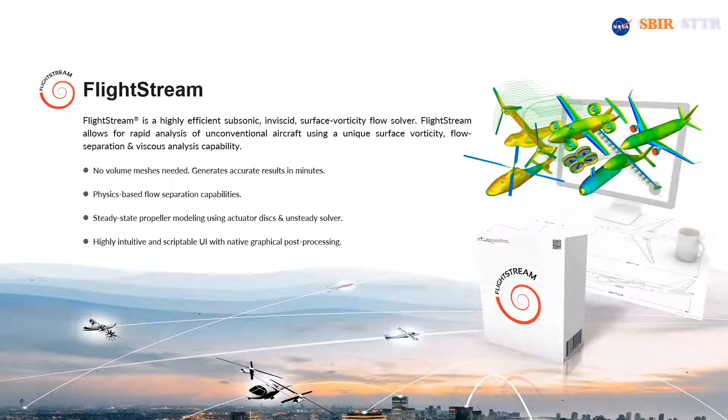Moving on to our involvement with VSP: in 2014 we went to the VSP workshop in San Luis Obispo and introduced FlightStream to this community with some VSP models. Ever since then, and continuing to today, we use VSP pretty heavily as one of our mechanisms for getting geometry into FlightStream. For this project we used VSP pretty heavily, and Amon's going to show you some very interesting stuff we were able to do with the VSP models.

There are several different ways you can get VSP geometries into FlightStream. VSP now offers CAD export, which we can exploit and have done quite a few examples with. But the thing we probably rely on most is CompGeom to do direct mesh creation or manipulation in VSP, and then export that to FlightStream. We now have some mechanisms to do control surface deflection—still refining and improving that capability, but it's a really nice way to get deflected surfaces into FlightStream. We're looking at more robust ways to connect VSP without having to go through the CAD functionality.

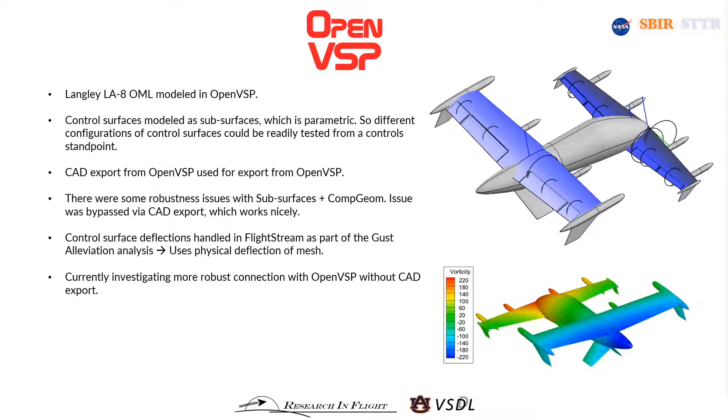We've done a lot of validation studies with FlightStream over the years, but for this STTR project, which has been UAM related, the LA8 configuration at Langley has been a very instrumental piece of our validation. Steve Guether at Langley has both run the wind tunnel test and done some validation work himself. We followed up with more validation work, and here you're seeing the wind tunnel results from the 12-foot tunnel at Langley compared with the FlightStream results.

You can see why you really need something more detailed than a vortex lattice code. We capture the complex geometric effects here on the aeroloads, and you can also notice that we capture the flow separation pretty well. So we're really quite pleased with these LA8 validation results.

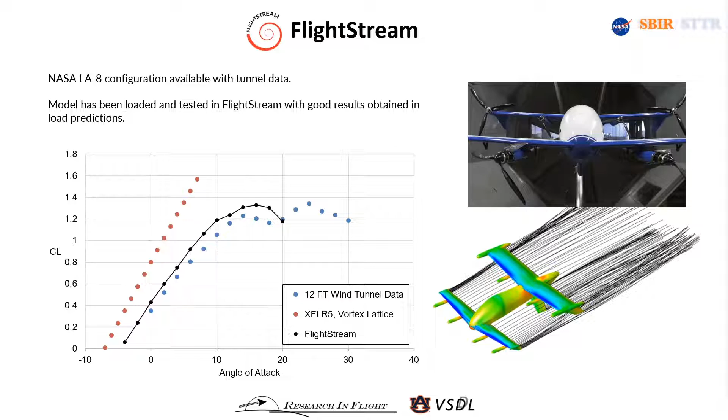This is just a little bit more to show some of our comparisons. We have a paper at SciTech next year to outline all this in much more detail, but here we're just looking at drag coefficient and moment coefficient. We've been quite pleased with the results on both.

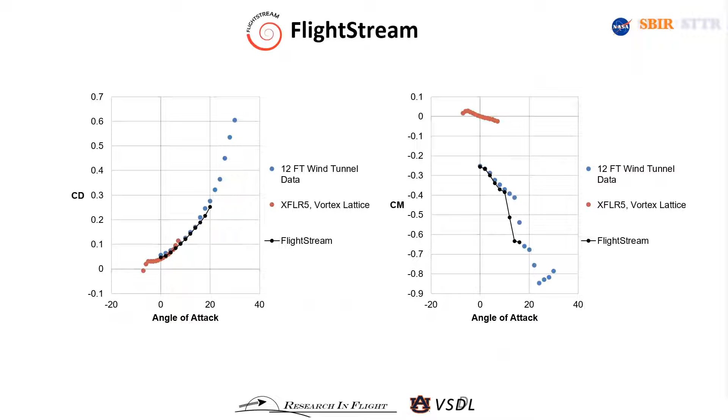So, a little summary of the FlightStream stuff: it's a vorticity-based solver developed by Research in Flight over a period of about 6 or 7 years to mature, and it's now matured into something we think is very capable. For this STTR project, we started developing additional capability using a tool called CLASP, Controls and Load Alleviation Simulation Platform. That's Amon's part of this project, and he's going to spend quite a bit of time describing that in just a few minutes.

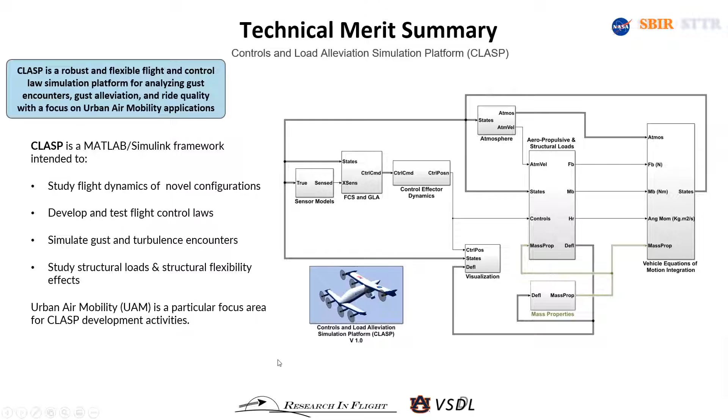Our focus thus far has been on hooking together this framework and getting it to a point where, even if the underlying analyses are somewhat simplified, we have a proof of concept of the integrated functionality. CLASP allows us to model sensors and flight control laws, as well as gust load alleviation algorithms and the dynamics of control effectors. For instance, a control surface is an example of a control effector. Propulsors for UAM type vehicles are also examples, and they all have their individual dynamics—they're not instantaneously acting, so we can model those within CLASP. We can visualize the flight of the aircraft through an interface with FlightGear Flight Simulator.

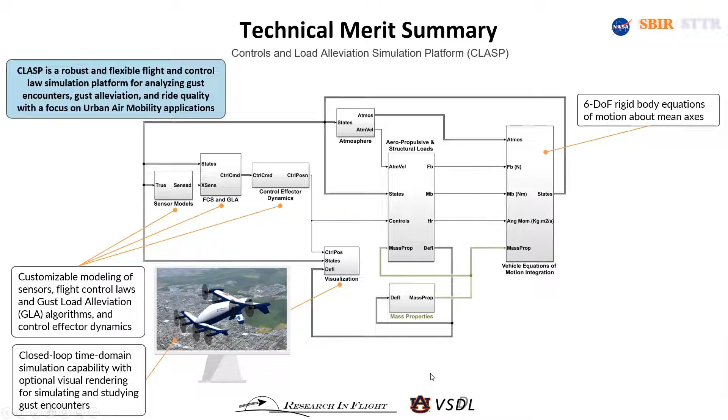We'll see some examples of that later on. We have the ability to do closed loop simulation, with the controllers active. We use rigid body equations of motion, 6DOF, about the mean axes, because that allows us to use modal approximation for the structural dynamics. At the core of this, we have the aeropropulsive characteristics of the aircraft, derived from FlightStream analyses, which then get incorporated within the CLASP framework, either as lookup tables, embedded analyses, or reduced order models of some sort.

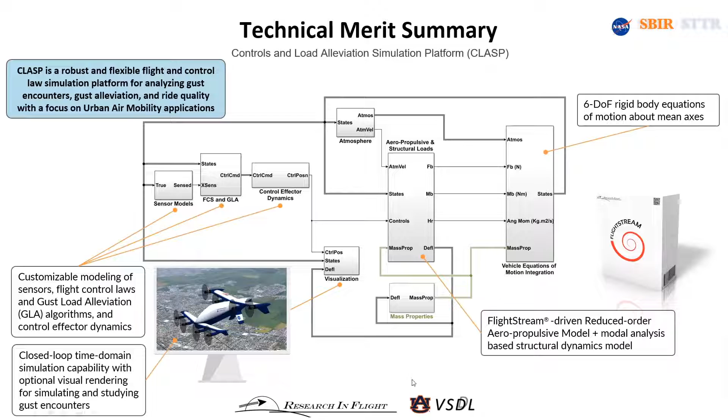Without getting into too much detail, I'll make a few comments about this gust modeling capability. We have a complex looking diagram here, but the part about FlightStream is shown in the orange boxes—this is where we interact with the CLASP functionality. Basically with FlightStream, we have the geometry coming in with control effectors and propulsors.

We put in whatever position and orientation is required, then run through an unsteady solver and look at the evolved loads, and output the loads to the 6DOF. We close the loop by going back through the time-dependent boundary and time-dependent wake evolution, reposition the geometry, and do the unsteady solver again. The output then interacts with Amon's CLASP tool. So we'll go to the next slide.

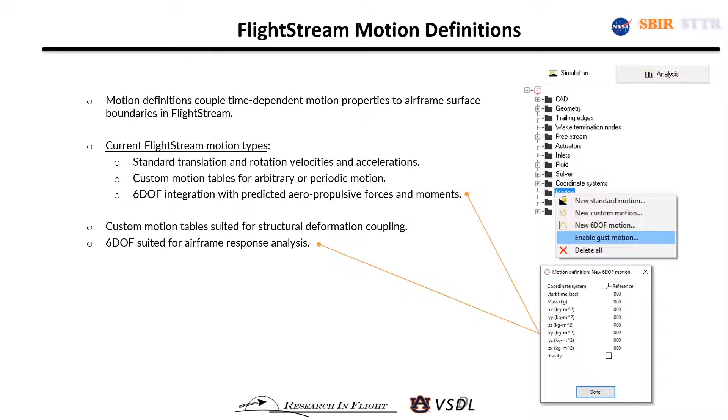In order to do this problem, we had to put in motion definition. This slide describes the motion definition capabilities we've added to FlightStream. We've got standard translation and rotation velocities, but also custom motion tables, and 6-DOF integration with some additional motion capability there. We can talk a lot more about that offline, but we do have an unsteady solver—unsteady at the surface—and unsteady loads we're able to generate with rotating propellers. This forms the foundation of what we're doing with this gust modeling.

I won't get into too much detail with exactly all the details of the unsteady solver, but this is just illustrating our capability to do both 6-DOF type motion and propeller blade rotation with the effects on the wings there.

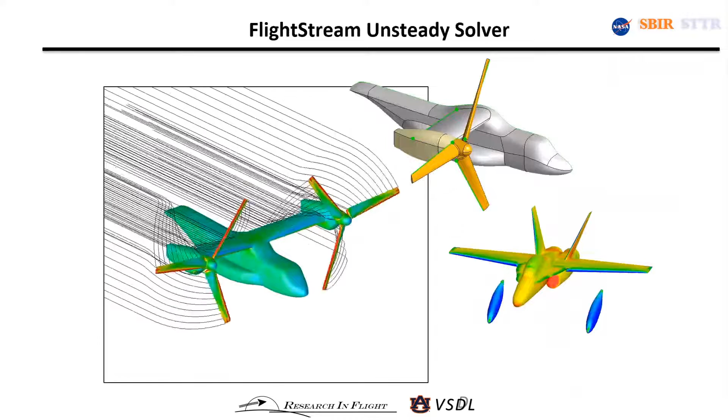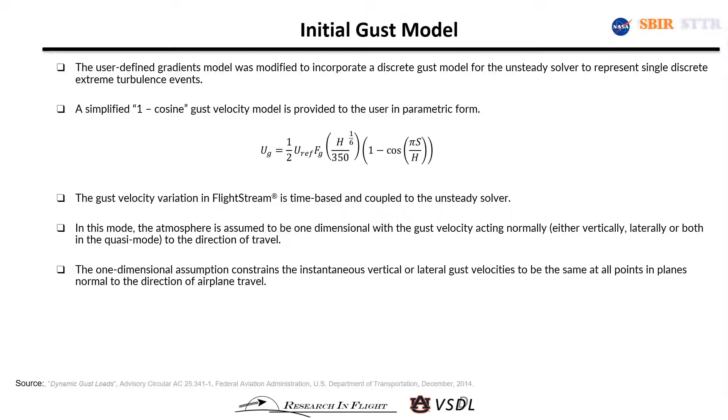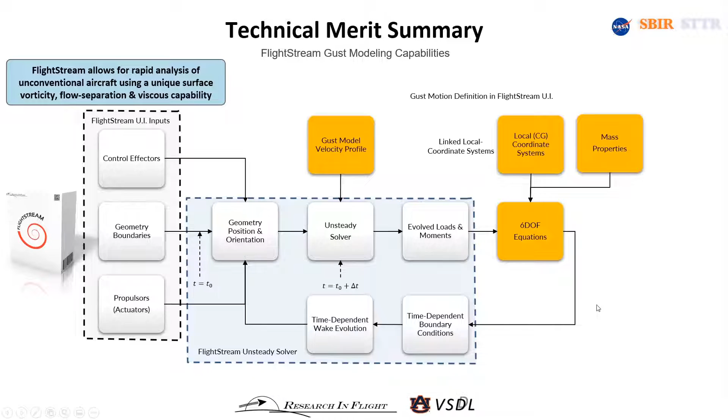In our STTR reporting, we have to talk about the technical merit, and FlightStream basically allows for the rapid analysis of unconventional aircraft using this unique capability for surface vorticity solving and flow separation with some viscous effects added. So it's kind of a middle of the road in terms of fidelity, but it offers the speed required to actually approach this gust modeling problem.

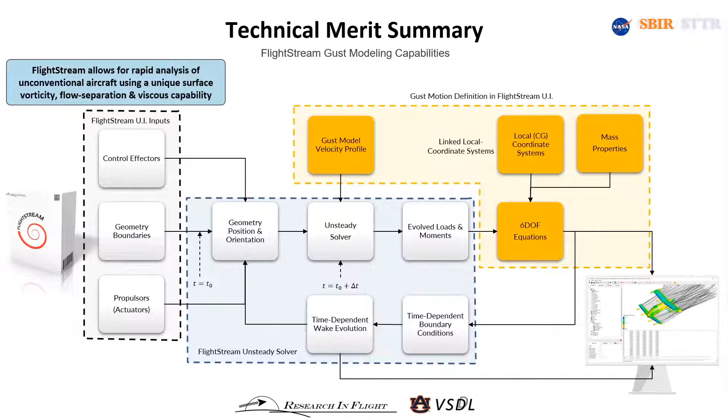I'm going to give Aman a chance to talk a little bit more about the gust definition when he gets to his slide.

So the gust encounter problem is just illustrated here in this little video. You can see what happens to the load as the gust goes over the airplane. This is basically just a time-dependent evolution of the gust passing over an airplane in forward flight.

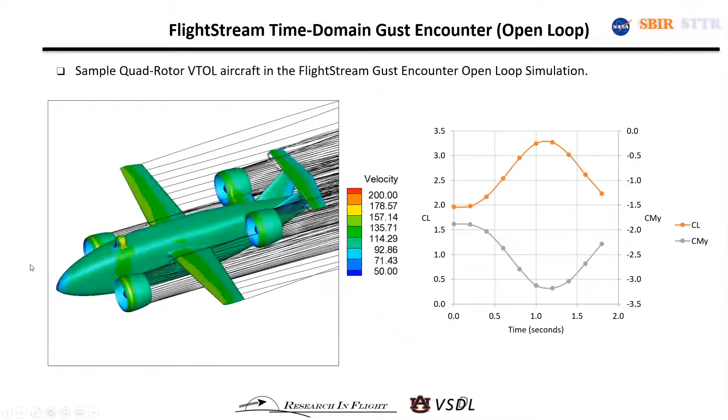So this reduced order model essentially reduces the aero, in order for us to interact with Aman's CLASP tool, to a quarter chord imposition of loads along the wing. This allows us to go to a strip model and interact with the flight dynamics software and simplified models. This is a novel approach we've decided to take with this particular project, because the whole idea is it allows us to get better fidelity loads than you could get with vortex lattice, but still apply the loads in the same way as if they had come from a vortex lattice tool.

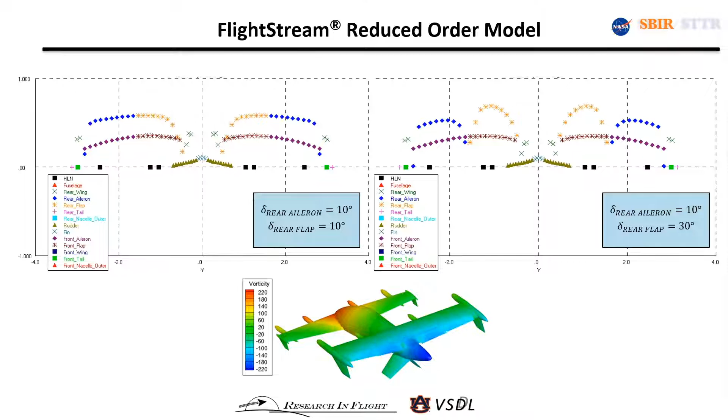So this is just some examples of some reduced order model loads that we've gotten from the LA-8.

So to do the aero analysis and FlightGear, basically we were able to generate an OpenVSP model and put it into FlightStream, get the loads, and then Aman was able to take CLASP and interact with FlightGear.

The other track, mostly for the flight simulation and visualization track, has the same OpenVSP model exported into AC3D, which is a geometry rendering tool, and we create a flight gear aircraft model for the flight gear flight simulator. When the CLASP Simulink model operates, it actually pushes data and interfaces with the flight gear flight simulator, and that provides us a visual rendering of the flight and trajectory of the aircraft.

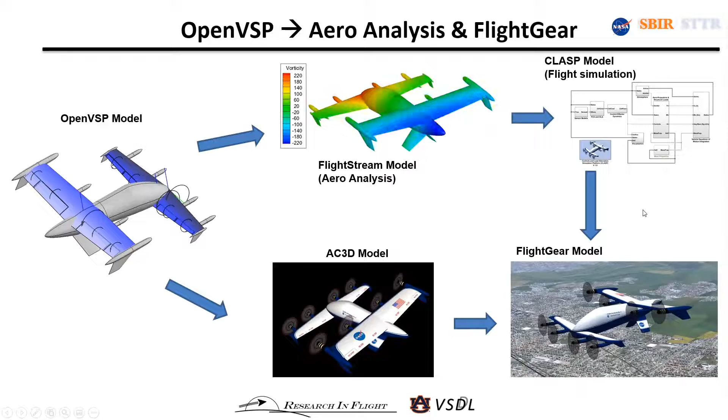Now let's talk about how we've modeled the flight dynamics and the structural dynamics of the aircraft within CLASP. As Roy alluded to previously, we use a strip theory-based aerodynamics model, an aero propulsive model.

The idea is that the lifting surfaces on the aircraft—for phase one we've just concentrated this to the fore and aft wings—we look at the aerodynamic loads as a buildup of loads over a large number of span-wise strips on these wings. At each of these strips, we can compute the local incidence angle seen by that strip by looking at the gross motion of the airplane, its attitude relative to the oncoming free stream, any angular rates like roll, pitch, yaw rates it has, the geometric location of where those strips are, as well as the effects of downwash, and also if there's any structural deformation going on, that creates a normal component of velocity seen by the strip as well.

Also, as Roy alluded to, using the strip theory-based model, sectional loads basically originate at the quarter chord point of these strip airfoils.

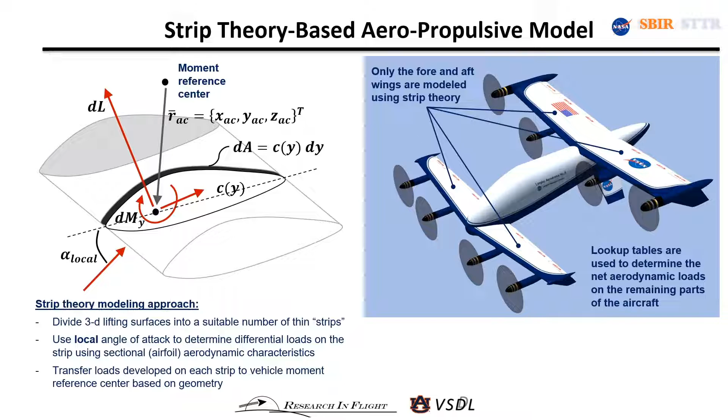And depending on where that quarter chord point is, we then sum up the loads and moments relative to the aircraft's moment reference center. So that, in a nutshell, is how the strip theory-based model works.

In phase one of this effort, we've focused on forward flight conditions, and we haven't looked in great detail at the effect of prop wash going over the wing. So those are all activities we've got lined up if we have a phase two funded.

We also want to have a tighter integration between the reduced order model that Roy mentioned that would come out of FlightStream, and then directly integrate it into CLASP.

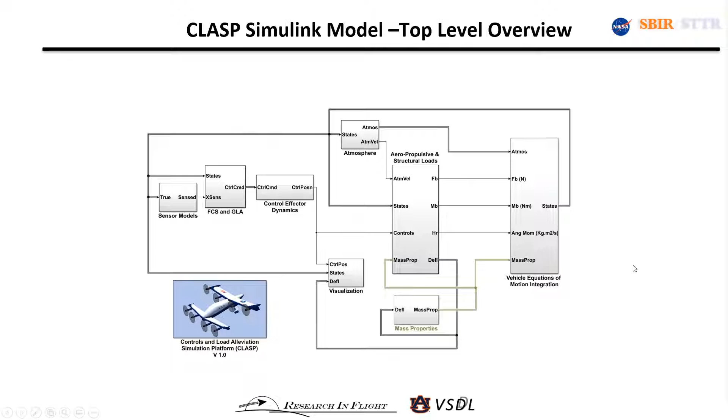Here's a top-level overview of the CLASP framework, the Controls and Load Alleviation Simulation Platform. This is a Simulink model, and this is the top level of that model. We have, in this sensor models block, models for the dynamics of sensors.

So the difference between a true state and a sensed state as sensed by the sensor. Obviously, these sensors have their own dynamics, probably bias or noise. So those things we can model within this block.

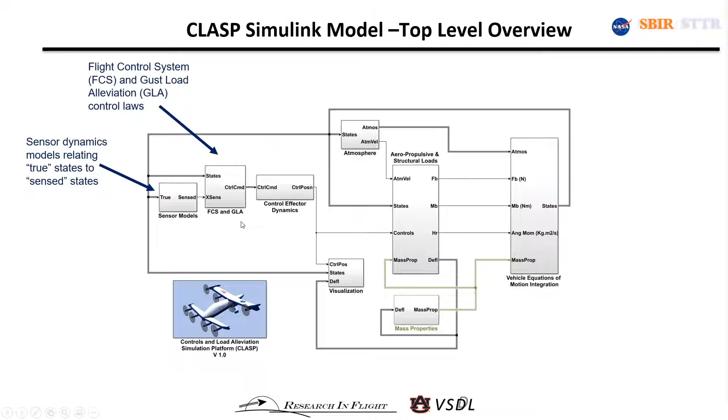So flight control system, FCS, and gust load alleviation, GLA. The control laws for closed loop control of the vehicle are all modeled within here, and there's great flexibility as to the type of controllers that are modeled. We'll see some examples of what we've incorporated for our phase one.

Between a control command being generated and a control effector assuming a particular state, there's of course the dynamics of the control effectors, which we can also model by anything starting from a first-order dynamic to a second-order dynamic, or anything even more customized. So these are all possible within the control effector dynamics block.

We have a fairly robust way of defining how the atmosphere itself is moving, so the ability to program in winds and gusts and turbulence. This is something we have in this atmosphere block.

The main block, basically the heart of the CLASP framework, is of course where the aero-propulsive loads and structural deformations are summed up. And once we have the gross loads over the entire body, we integrate the equations of motion to compute the time history of the trajectory of the body.

And because we use the mean axes as the vehicle deforms, the center of gravity of the vehicle will also move. Imagine the wings bending - that's going to result in a movement of the center of gravity. And the mean axis approach requires that the position of the center of gravity is tracked for the rigid body equations of motion.

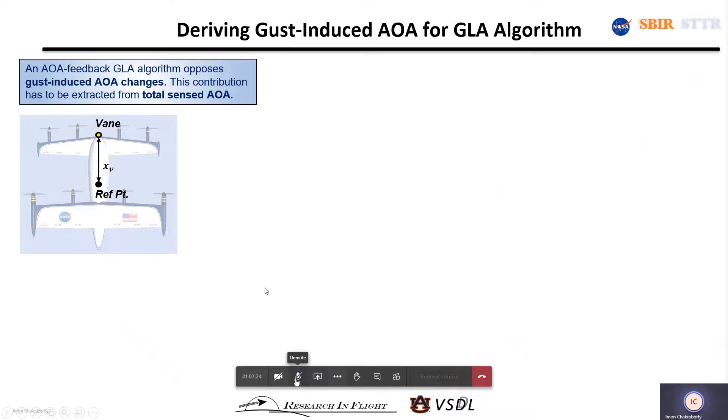So now I'll talk a little bit about the gust alleviation algorithm we've got implemented right now.

Hey, Imon, if I could pause you for just a moment - we have several questions here in the Q&A. Before we continue on, regarding the Simulink control system model, is that open source, or is that all controlled and owned by Research in Flight?

Well, it's very much in the development stages right now, the CLASP framework. It is something that we ultimately plan on commercializing, so the end goal is it would be available as a commercial tool, just like FlightStream is.

All right, understood. Could you elaborate on the type of controller that was implemented within this algorithm? Absolutely - actually, I was going to walk through that in the following slides.

Wonderful, wonderful. Another couple questions, just very briefly. Can the derivatives and the lookup tables mentioned in the MATLAB 6DOF model be reliably extracted from OpenVSP, or do you rely on FlightStream for that? We rely on FlightStream for the aerodynamic analyses that generate the lookup tables.

Wonderful. And now we've got a question here that says, it looks like FlightStream assumes a rigid structure. Can it also work with a flexible structure, or is it all rigid body?

Yeah, no, I can answer that. Of course, the steady solver assumes a rigid body, but we do have an unsteady solver that is able to do the non-rigid structure problem.

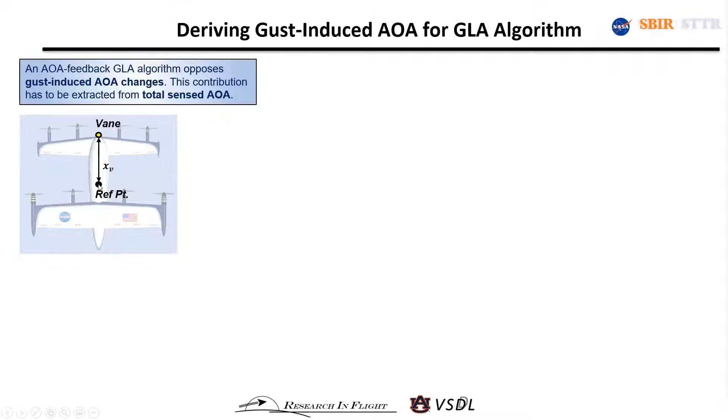The thing to note is that because there's an offset between the airplane reference point, you can think of it as a CG, and the vane, the angle of attack picked up by the vane is also affected by any angular motions of the aircraft. So we're able to model within CLASP what the angle of attack sensed by the vane is as a function of where the vane is located and the motion of the aircraft.

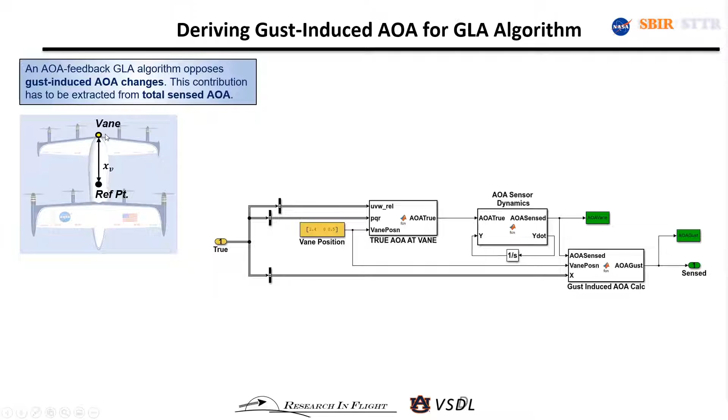And since this angle of attack vane is bound to have dynamics of its own, we can represent the dynamics of that sensor in as simplified or as complicated a manner as we want, so there can be n number of sensor states. And the gust alleviation algorithm, of course, we don't want it to respond to the total sensed alpha. We want it to respond only to the gust-induced angle of attack.

So there is a way to extract the gust-induced angle of attack from the total angle of attack seen by the vane. Now there are two ways of looking at this, and that depends on whether we assume there's a change in the gust field velocity over the dimension of the vehicle. So imagine, is the velocity of the gust changing over this length of the vehicle?

If the answer is no, then we can just calculate the angle of attack at the vane based on the relative location of the vane to the reference point where the aircraft motion states are calculated. On the other hand, if you have a velocity field where there's appreciable variation of velocity between any two points on the vehicle at the same time, then what we can do is add the position of this angle of attack sensor to a list of query points used to query the state of the atmosphere, so we can get the velocities directly.

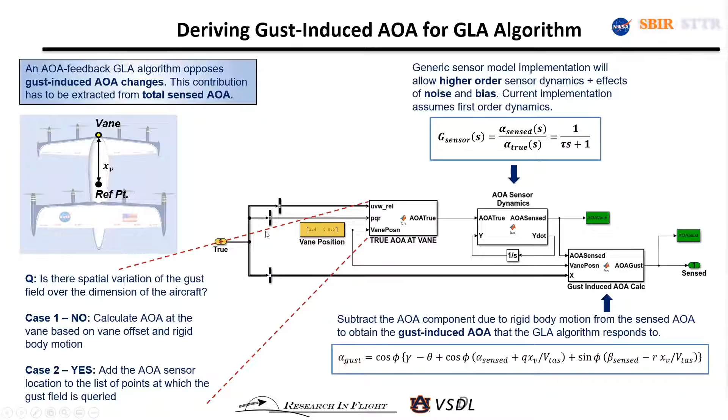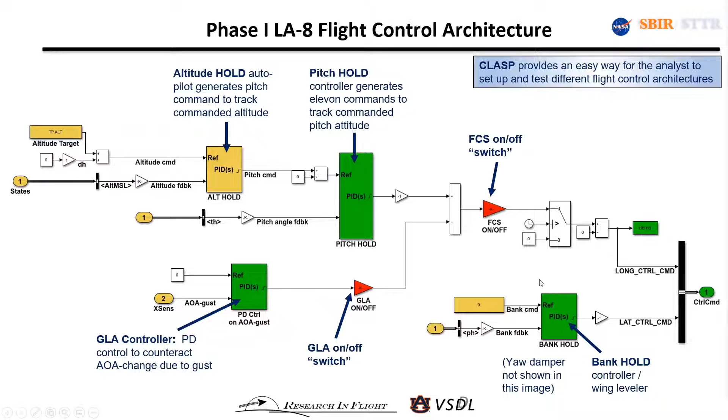But we anticipate that for our specific problem, we're going to have plenty of cases where the wind velocity changes over the span of the body. So we have this user-defined velocity field as well.

So query points in our case would be all the aerodynamic centers of all the strips on the vehicle, as well as the locations of any air data probes on the vehicle. So we would want to query the velocities seen by each of these points because they factor into various calculations downstream.

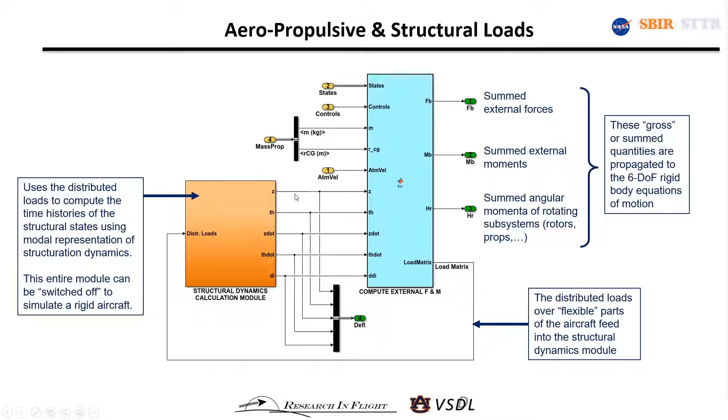The same loads in a distributed manner get put into a load matrix, which has basically the distribution of bending and torsion loads over all the flexible structures, and that goes right back into the structural dynamics block to compute the new deformed state. So this is happening at every time step of the simulation.

The structural dynamics modeling that we've got so far for phase one assumes that the only flexible components on the aircraft are the four wings, and they're modeled as cantilever box beams. So they're rigidly fixed at one end, and they're cantilever free at the other end.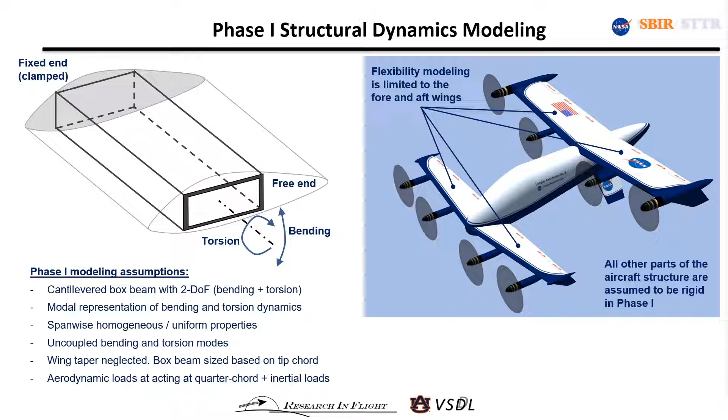And they have degrees of freedom in bending in the lift direction, if you will, and also torsion in the twist direction. And for phase one, we've assumed that the bending and torsion modes are uncoupled, and it's just a simplification made to do an initial implementation.

We've sized the box beam based on a small optimization problem. So it's basically, if you assume that the leading and trailing edges are at fixed locations, how thick do you need to make the box beam in order to satisfy a tip deflection and a tip twist constraint, as well as lower bounds on first bending and first torsion frequencies, subject to a certain n-g load condition.

So that's solved as a small pre-processing optimization problem. And once that problem is solved, we get the bending and torsion mode frequencies as well as mode shapes. So you see the bottom right, the first three mode shapes for bending and torsion, as well as the frequencies for bending and torsion modes.

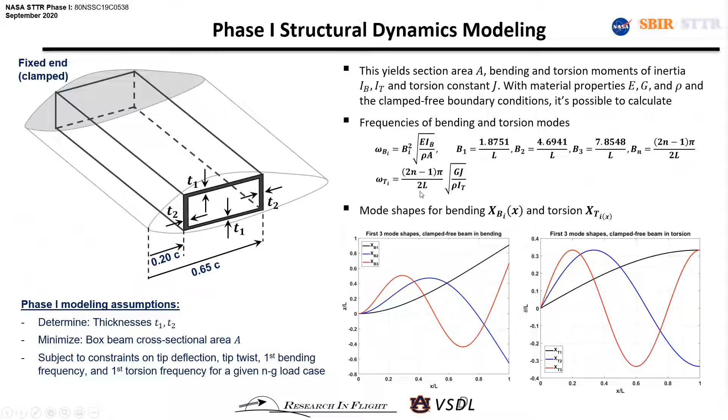These all get embedded into our structural dynamics model. And the way we calculate the deformed shape of the wings as a function of time is by a modal approximation method. So what that does is it evaluates the physical deflected state as a truncated summation of those mode shapes that you saw, along with generalized coordinates representing bending and torsion. And the user has freedom over how many modes of that infinite summation the user wants to keep before chopping off the sum and truncating it.

So within the structural dynamics module, we have these distributed loads that come in. And if you have structural modes in bending and torsion whose frequencies are close enough to the rigid body frequencies that you want to integrate them together with the rigid body motion, then that can be done. So here you have actual time integration of bending and torsion modes whose frequencies are relatively low.

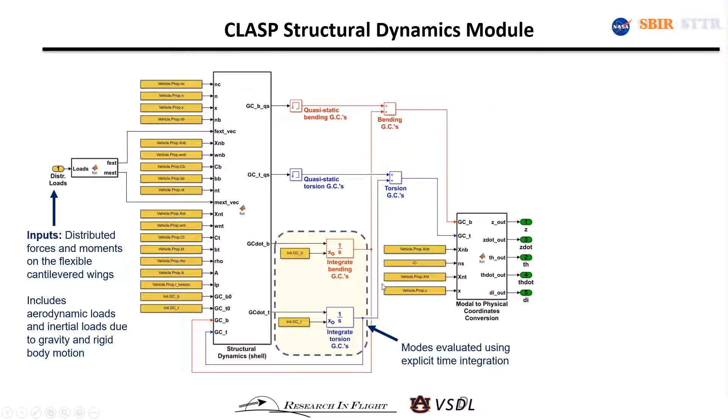If, on the other hand, you have bending and torsion modes whose frequencies are high, then what that basically means is that as far as the rigid body motion of the aircraft is concerned, those particular modes are always in quasi-static equilibrium. So then we don't bother with time domain integration, and we just propagate the quasi-static deflections directly.

So in a typical problem, the lower few modes will be time integrated, and higher frequency modes will just have the quasi-static contributions. And finally, the modal coordinates are abstract coordinates. They have to be converted back into physical coordinates, so things we can visualize, like a bending deflection or a torsional twist, and the rates at which these deflections are happening. And these will then get output to aero-propulsive and mass properties modules.

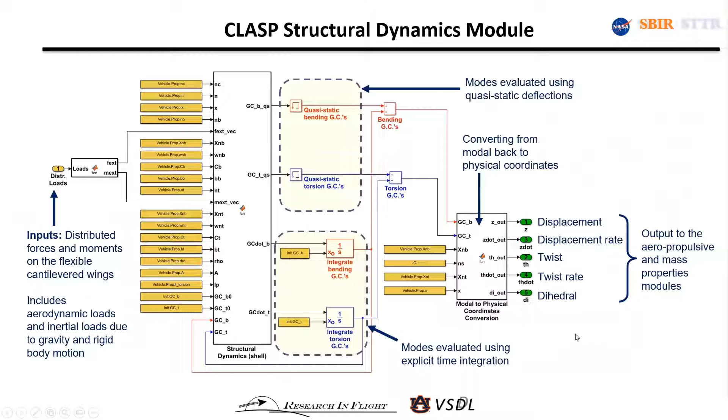One interesting thing we had to figure out was, how do we trim this flexible airplane? And not only how do we trim it, but how do we do it without having to change the setup of the trim problem if we decide to switch the structural dynamic stuff off and do a rigid body simulation. So the flowchart on the right shows what we ultimately came up with.

So you have the trim algorithm, which is actually an optimizer. The reason we've set it up as an optimizer and not a root solver is because we totally foresee trim for these UAM type vehicles as being... I mean, these are all over-actuated systems. So there are far greater number of control knobs than the degrees of motion freedom of the body.

So in the general case, there will be more than one unique trim solution. So to choose among them, we have to minimize some kind of an objective function. That's why trim is set up as an optimization problem. The optimizer is basically passing down trial solutions of control and state variables. Control variables would be control deflections or propulsor RPMs or blade pitch, and state variables would be angles of attack, angle of sideslip, and so on.

And for each such trial solution, we first iterate the aerodynamics and the structural dynamics to an internal convergence. So think of it as exposing the aircraft to the airstream and letting the flexible structure blow itself into an equilibrated state. And then once that internal convergence has happened, we then go and check whether the 6 degree of freedom equations of motion are satisfied. So is there dynamic equilibrium there?

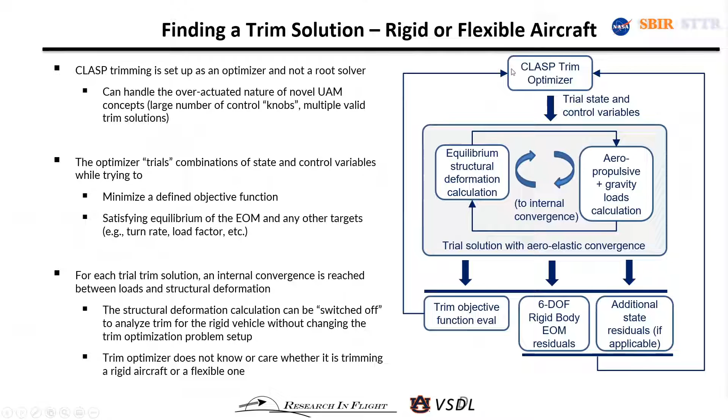Okay, so now we just look at a couple of quick results. We've simulated a symmetric gust encounter, so longitudinal motion only. We've simulated an asymmetric gust encounter, which is basically just one half of the airplane, so just imagine the right wing encountering a gust and nothing happening to the left wing. And then turbulence. Okay, so here's a symmetric gust encounter simulated by CLASP.

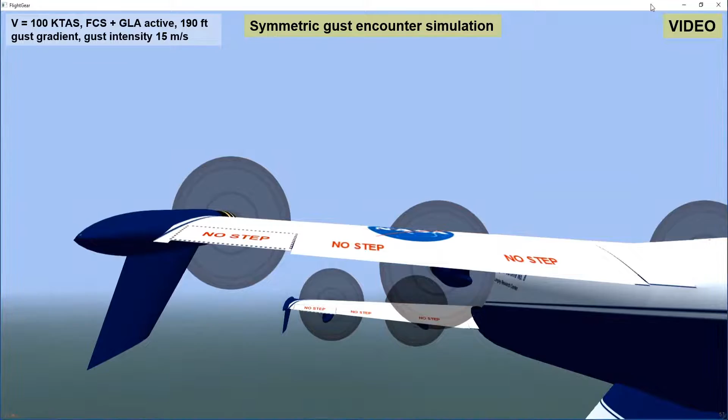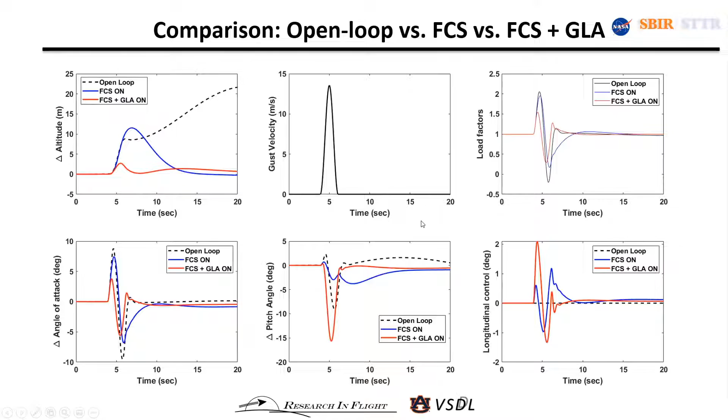Angle of attack is directly related to the amount of excess lift, which is directly related to the load factor. As a result, the peak load factor is lower, but at the same time the control action taken is a lot more aggressive. If you look at the red control input for the elevons versus the blue control input, that's a lot more aggressive. So this is just a proof of concept—can we see the difference between these three different simulations?

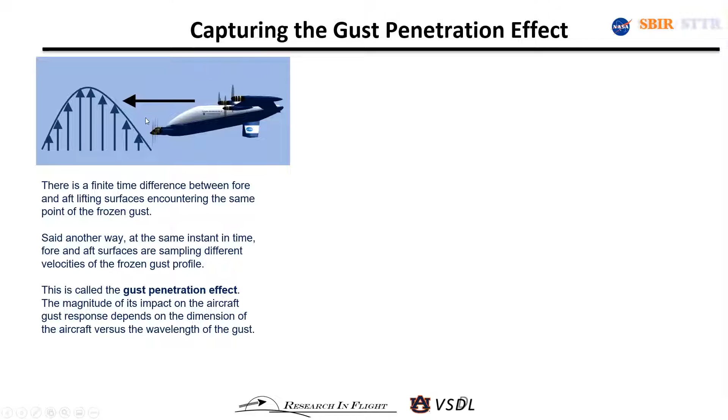Another interesting thing is that once this vehicle flies into the gust, there's a finite length of the vehicle and a shape of the gust. The front and aft lifting surfaces sample different velocities at the same instant in time, and this is called the gust penetration effect. In the earlier part of our work, when we just used static lookup tables, we were just querying one single alpha for the whole vehicle.

So we couldn't really capture this gust penetration effect. When we did that same gust encounter back then, the moment the vehicle encounters the gust it pitches down. Intuitively you'd think as this wing enters the gust, the vehicle will pitch up first, and then as both wings enter the gust, static stability will take over and the vehicle will pitch down. But if you don't take into account the gust penetration effect, you can't capture that pitch up. With our strip theory-based model now, there's the pitch up—this is when the front wing has entered the gust but the back wing has not, so the vehicle pitches up, and then the pitch down happens as both wings get into the gust field and static pitch stability begins to show its effect.

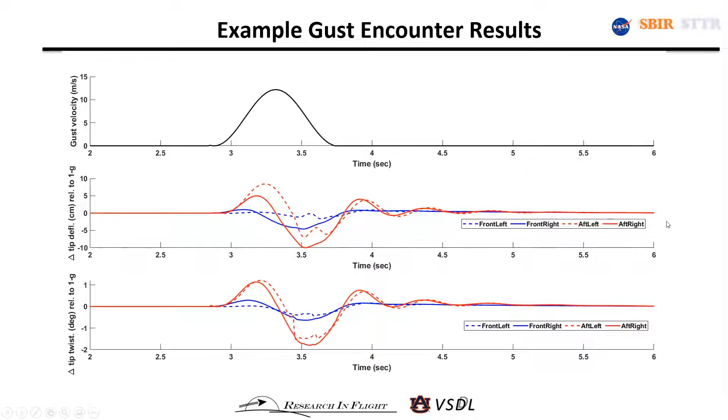Here's an example of an asymmetric gust—only the right wing gets hit, so the lateral controllers come into play trying to stabilize the bank angle of the aircraft. This is just an expanded view of the deflection and twist of the tips of all four wings when it encounters the gust. So it sets up a structural dynamic, and then that dies down after some time.

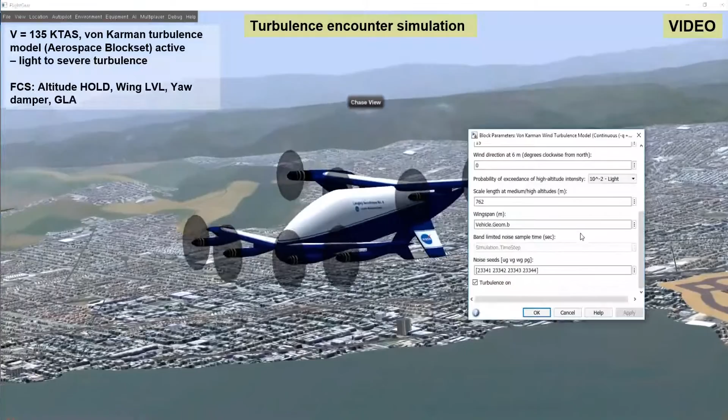The final thing is a turbulence simulation. This is just using the von Karman turbulence model that's part of Simulink, so basically you turn on the turbulence and turn off the turbulence as you please, and then you can see how the vehicle responds to that turbulence field. The control action is a little bit difficult to see because they're small, but the elevons are being deflected by the control system to try to counteract the turbulence, and the severity of turbulence, of course, can be varied as well.

So to summarize, we believe we've got a reasonably good proof of concept setup of the CLASP environment and getting information from FlightStream. If we get funding for phase 2 of our work, this is going to be our launching point, and we're going to add capabilities, most importantly for vertical flight mode. All our work has been forward flight in this phase, so our top priority for funded phase 2, if it's funded, is vertical flight mode for UAM type vehicles.

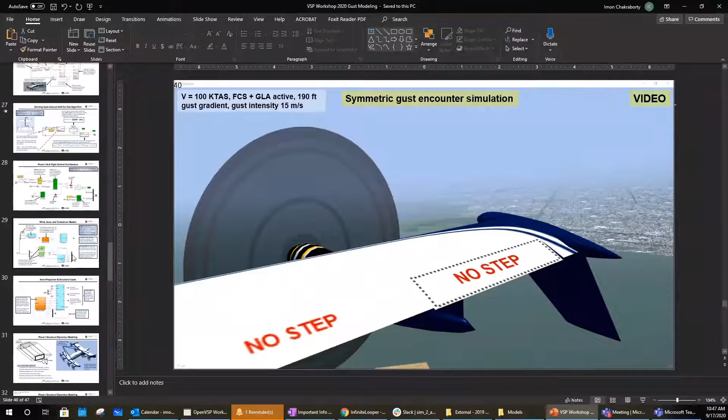In our strip theory based model, only the lifting surfaces are analyzed using strip theory. For the rest of the airplane, the fuselage and the vertical fins, which are considered rigid, we've run FlightStream on the whole geometry and created static lookup tables for the assumed rigid part of the geometry. So the fuselage and the effects of the fins are lookup tables for the 3 force components and 3 moment components as a function of alpha, beta, and rates.

The strip theory model is for the flexible part of the vehicle, so the 4 wings are strip theory. The implementation is general to the point where, provided the lookup tables are in a particular format—like Z as a function of XY—it's insensitive to whether that comes out of FlightStream or out of any other aerodynamic analysis tool.

This was actually one of the starting goals of the CLASP environment: it should not be married to any one source of aerodynamic data. So yes, if there's analysis coming out of VSP Aero—I think that was the question—then we just have to get the lookup table into the agreeable format, and we would be able to do the simulation. We don't have a demo of that at the moment, but this is something we could definitely pursue in the future.

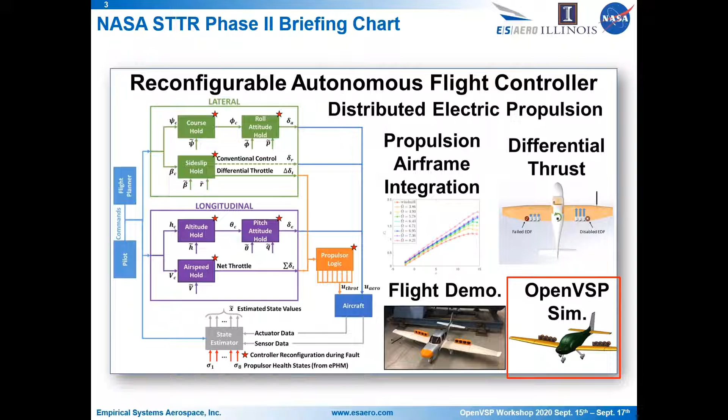What we'll be focusing on today is the comparison of our estimation of flight dynamics with OpenVSP and the system identified flight dynamics from our flight testing campaign of the subscale vehicle.

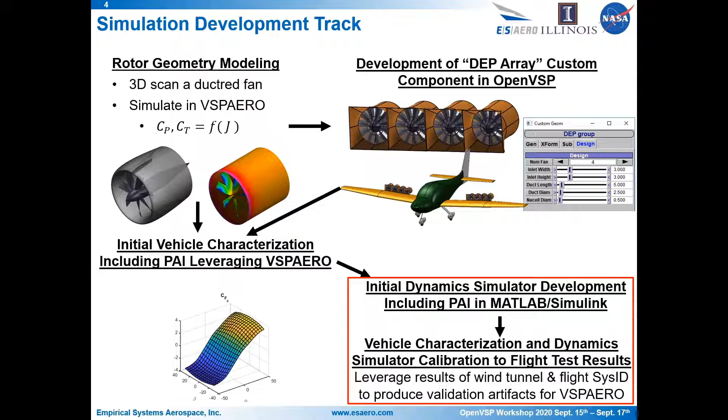On the VSP Aero side of things, last year one of our engineers, Nick Brake, presented a status update on this program, detailing how we modeled our ducted propulsors in VSP, our development of a DEP array custom component to ease the modeling process of those propulsors geometrically, and our initial vehicle characterization, including propulsion airframe interactions using VSP Aero. What we'll be talking primarily about today is our initial comparisons of those dynamics estimated in VSP Aero to flight test data and system identified flight dynamics.

With that, I will dive right into how we're modeling our aircraft dynamically and our comparison between VSP Aero and flight test.

To begin, we start off with standard textbook longitudinal and lateral directional aircraft dynamics systems of equations in 6 degrees of freedom motion, presented here in state space form. We have a handful of stability and control derivatives for the baseline aircraft with control surfaces that can be estimated by use of VSP Aero and the automatic stability calculation subroutine within it. For reference, I also provide our axis system, which will be relevant to keep in mind later for positive forces, moments, and control surface deflections.

From that baseline 6-DOF modeling, we also wanted to capture the influence of propulsors on the aircraft dynamics as well as control. So in order to do this, we characterized the propulsor used on the subscale flight test vehicle using XROTOR to build an aero performance map.

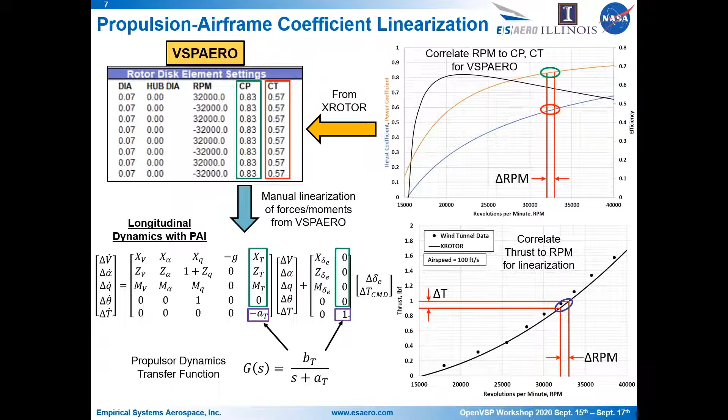From here, I want to take a look at how we're using VSP Aero for this. We started off by using the simplest solver, the vortex lattice method steady solver, with the geometry observed above. It was a really fast and computationally efficient method for generating aero forces and moments, generally effective for very simple planform geometries like our conventional Cirrus SR22 model. It also had the benefit of being able to use that subroutine for calculating stability and control coefficients for estimating derivatives.

But while we were working on that, the unsteady solver came out, and we decided we also wanted to explore that for producing similar data sets, primarily because we were interested in what might have been a more representative propulsor behavior rather than the rotor disks used in the steady solver. However, we quickly found out, due to the very high RPM of the propulsors compared against the very low velocity of the aircraft, it became a very slow and computationally heavy process.

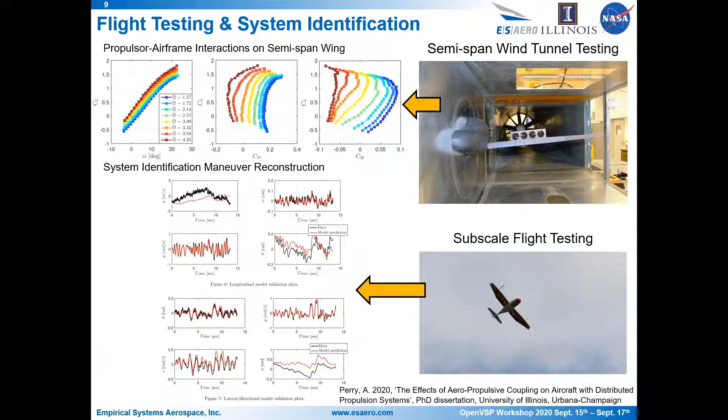With that, I'd like to dive into the beginning of our comparisons of these models. So the first step in comparing the models is the model architecture itself. The system of equations that underpin the estimation methods between VSP Aero and system identification are largely similar but differ in important ways. The primary way in which they differ is the definition of propulsor contributions to the flight dynamics.

As I mentioned before, with our VSP Aero approach, we are looking at differences in thrust input with a propulsor dynamics model included for an actuated response in the aircraft dynamics.

But in the system identification model, the flight test data extracted from the flight test campaign really can only trace throttle input. It's very difficult to get beyond throttle and connect the dots between throttle and thrust. So in addition to that, there are no propulsor dynamics included. There's an assumption that they may not be significant enough to warrant inclusion in the dynamics here. So those differences are hard to bridge across the gap.

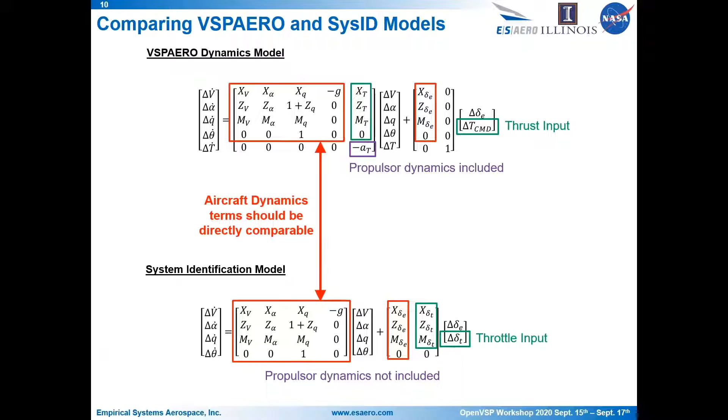In addition to looking at the models themselves, we have to reconcile what is actually happening when we linearize forces and moments between the two approaches. This is probably the largest takeaway from our work thus far: in VSP Aero, you can set the vehicle to a specific trim flight condition and run analysis on that.

If you want to look at how forces and moments change with a deflection of the elevator, you can do so while keeping the vehicle parametrically locked, holding all other parameters constant—same airspeed, same angle of attack, etc. This allows for a more decoupled analysis of each state and control parameter to narrow in on their specific contributions to dynamics. This is most similar, in the physical testing environment, to a wind tunnel test on a fixed sting, where you can hold the vehicle in a flight condition and perform these tests.

On the system identification side of things, even though the equations of motion which underpin the analysis are very similar, the vehicle is flying and therefore is able to react to perturbations of control vectors. So with our example, if you're at a trim flight condition and you deflect the elevator, you will have a very quick response which changes other state parameters such as airspeed, angle of attack, nose down pitch rate, and attitude, which will continue to change throughout time very quickly, and you find yourself in a different dynamic state than you were before.

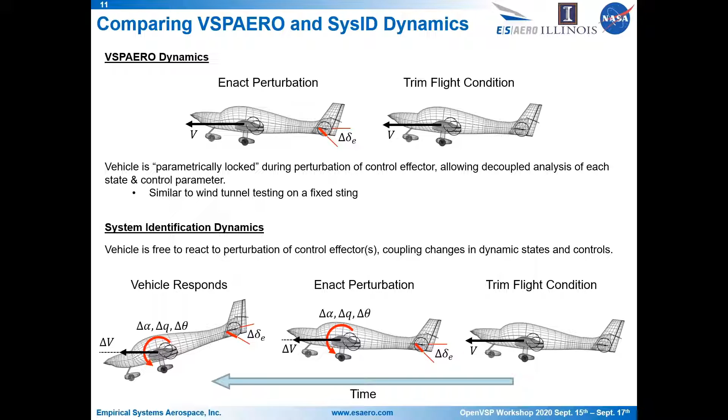The challenge that introduces is when you have very similar terms building out the equations of motion in state space form with different stability derivatives, it becomes difficult to determine whether the change in forces and moments should be attributed to the control deflection which you enacted, or the immediate changes to the other states which followed from that. So this muddies the water from an apples-to-apples comparison to something different.

The first being force in X due to changes in airspeed—that's largely a drag estimate, and it is known in the VSP community that the vortex lattice method has within itself a very rudimentary estimate for parasite drag. There are better ways to estimate that, even within OpenVSP, using the parasite drag tool to get a better idea of that characteristic. So that might help explain some of the differences there.

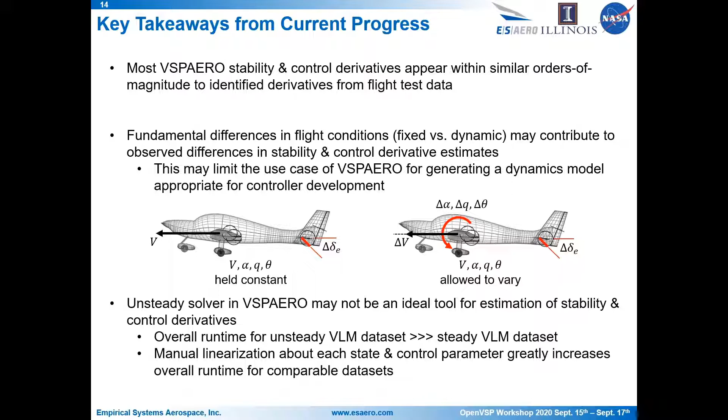From that, we have some next steps that we really need to address for our work. The first of which being to reintroduce the fuselage back into the analysis, maybe with a simpler geometry that represents the general shape of the fuselage, to see if we can correct some of those derivatives that are known to have notable effects from the fuselage itself.

And then, while we say that the unsteady solver might not be ideal for a full stability and controls analysis, we can still look at point cases by running a fully developed unsteady case at the baseline trim condition to compare results from steady and unsteady, and what that might tell us for our accuracy there, providing a more complete comparison of relative performance versus resource cost.

We also want to take a look at the VSP Aero and system identification estimates for propulsion airframe interactions and their effects. This may require converging the underlying dynamics models between the two approaches around propulsor parameters that can be tracked between both methods. The challenge being how we connect installed thrust on the flight vehicle to throttle, which is something that we can directly measure, and how we navigate that gap.

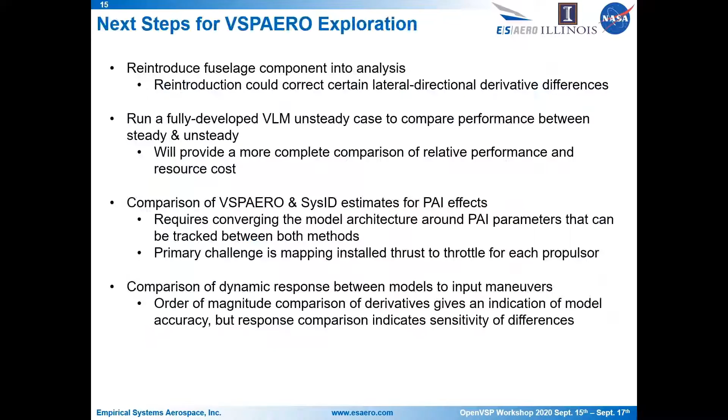Certainly, thanks Garrett for the talk. I think you make a really good observation about the discrepancy in timescales between what it takes to resolve an actual rotating propeller versus the dynamics of an airplane, just talking in terms of computational cost. I've also seen this when people think they're going to model a tiltwing through transition from start to end, but then resolve time-accurate rotating blades the entire time. A transition from beginning to end of a VTOL vehicle may take a minute, and if your props are at several hundred RPM, you'll need to model several hundred revolutions to capture that transition. Usually when someone runs a full CFD with a rotating rotor in time-accurate analysis, they consider it a big deal if they do 10 revolutions. So there is a fundamental difference in timescales you have to look at.

From the aircraft dynamics standpoint, the propellers really act as a time-averaged actuator disk when you're looking at modes like short period and phugoid. So you need tools that are mixed, and that's a question, clearly. The only other thing I'll add is that Dave Kinney is working on this. One of the things on his list, hopefully to do soon, is trying some even more simplified ways of modeling the rotating blades that would allow much faster modeling, closer to being appropriate for the aircraft dynamics timescale.

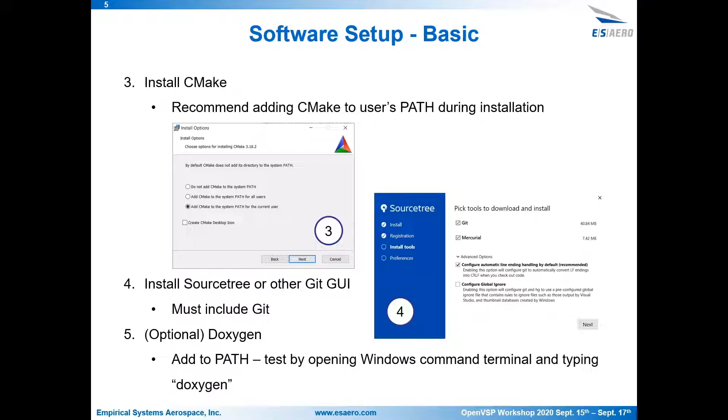When you download SWIG, if you're trying to build the Python API, you'll want to make sure you download the Windows version of SWIG—I think it's called SwigWin or something like that. I could go back and check the link if I included it. You'll extract the contents and place it in the directory if you like. If you're looking to build the MATLAB API, you'll need a different version of SWIG—you'll actually have to compile SWIG yourself. I'll be discussing that in the next presentation coming up.

So in terms of the MATLAB API, this presentation and the next one are very much linked together, because if you're building the MATLAB API, you also have to compile OpenVSP from source yourself as well.

When you're installing Anaconda, if you are using the Python API, I would highly recommend checking the box that adds Anaconda 3 to the system path variable during installation. It warns you against doing so, but I've never had an issue with it, and we've had users at ESAero compile with Anaconda using this installation method without any issue. Otherwise, you'll have to add Anaconda to your path manually, and I've had issues with that using the Python API. So this is just what I would suggest—adding it to your path during installation just makes everything a lot easier.

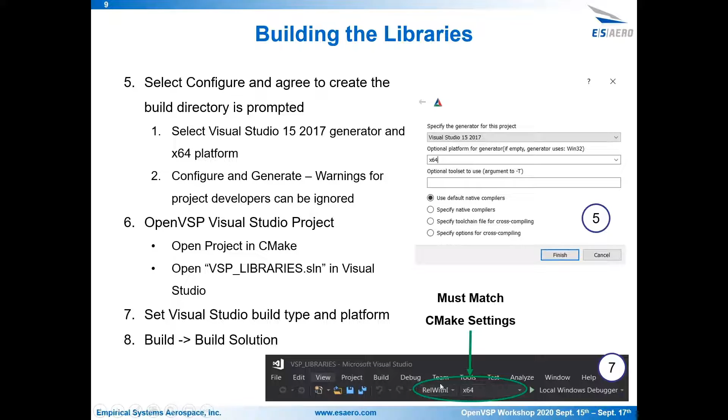Once you open Visual Studio, you'll have to make sure on the very top you match your build settings with what you selected for CMake. So what I had done was I added a CMake build type as Release with Debug Info, and I also used the 64-bit generator. In Visual Studio this is easy to miss because it doesn't always match automatically, so I made sure I selected Release with Debug Info here and 64-bit. And all you need to do is go to Build and click Build Solution.

Let's see if this will play. This is just a quick video so you're familiar with what building the libraries is going to look like. It's sped up a little bit. Building the libraries doesn't take too long; building VSP takes a little bit longer. This is just so you're familiar with the sort of output messages that you should expect. Sped up just slightly. Once it finishes, it'll say build successful, or how many built successful out of how many that you tried to build, and those should match. This should finish in just a second—let's jump ahead a little bit.

All right, so there at the bottom we see 12 succeeded, 0 failed. So that's good. Once that finishes successfully, we're going to move on to building VSP.

So just like before, we're going to open cmake. This time, instead of specifying the source directory as that libraries folder within the source that you downloaded, we're just going to use the folder of the clone repository, so the entire source directory. For the output files, similar as before, we're going to use an adjacent folder. So instead of VSP libraries, we're going to make one called VSP build or something like that.

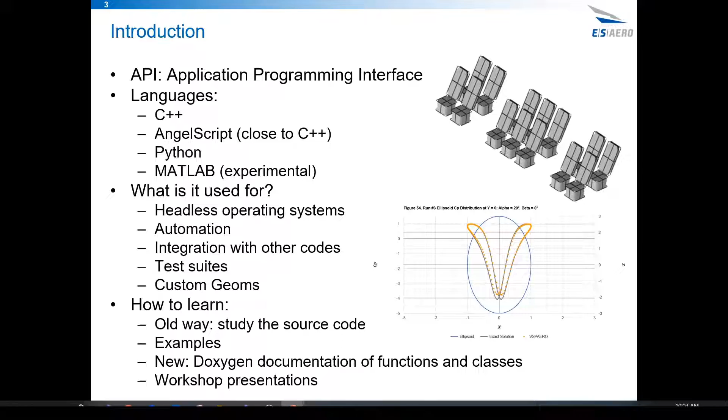So the old way to learn about the API was really just to study the source code. We didn't really have a whole lot out there other than workshop presentations and some wiki documentation. We provide examples as much as we can through the scripts directory that comes out with OpenVSP. But recently, there's been a Doxygen style documentation of all the functions and classes available through the OpenVSP API, so now that's kind of the place to start. I provide the link there to grab the latest version from the website, openvsp.org. You could download it directly, so that allows you to have access to it if you're not able to have an internet connection.

Just some general things about the API functions. A little while back, the analysis and results manager were created. Previously, for every different analysis-based tool in OpenVSP—mass properties, CompGeom, VSPAero, things like that—there were functions specifically needed to run each one. What the analysis manager does is allow functions to be used to set up each of the analysis inputs to those tools, execute them, and then collect results. The way we identify all the different analysis types is just through strings. An example is VSP compute geometry. To find out all the different ones available, you can use the list analysis function. And to find out what inputs are available for a certain analysis, you can use the print analysis inputs API function.

In the API documentation, and as I'm explaining these, I'm just writing out the functions generically. However, the C++, Python, MATLAB API all translate pretty closely, so the API documentation kind of applies to all of them. Using the analysis manager is preferred as opposed to some of those old functions that were initially available to run these different tools. One thing to note is with the analysis and results manager, we use arrays for the inputs and outputs. So even if we just have a single input, it's still input into the analysis as an array. Just one thing to be aware of.

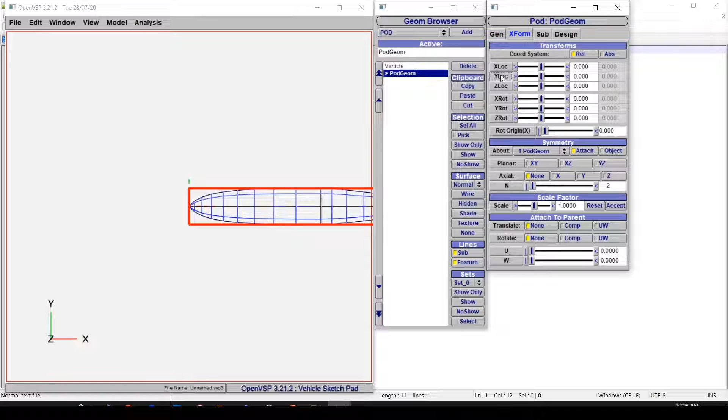You can also find out the parm name and description, things like that, by clicking on the parm button that's next to a lot of the sliders. This doesn't work for every GUI input, but for sliders and things like that, you could click on it and it'll pull up this parm info GUI that has the current value, its group, its description, things like that. So there's some ways that you can use the GUI to help you identify parms, or the VSP3 file format.

The first one I'm going to talk about of the supported languages of the OpenVSP API is the C++ API. This is the basis for all the other ones because OpenVSP is primarily written in C++. We have functions that are in what's called the VSP Geom API, in the Geom API project. That's where we expose a lot of the functionality of the GUI, everything under the hood, to a higher level that can be accessed through anywhere in OpenVSP basically.

Mostly the C++ API is used for our API testing. We have test suites for things like Parasite Drag, VSPAERO. The idea is we try to run these every time we have a new version about to come out, just to make sure we're not introducing any new bugs. Those test suites are hopefully going to be expanded more in the future. There's a CFD mesh one being worked on right now, but the whole idea is to help us catch bugs and things like that.

We also had them initially as part of our continuous integration builds, but they ended up being too time consuming. So there needs to be some work for those test suites at the moment, but we do have them in there.

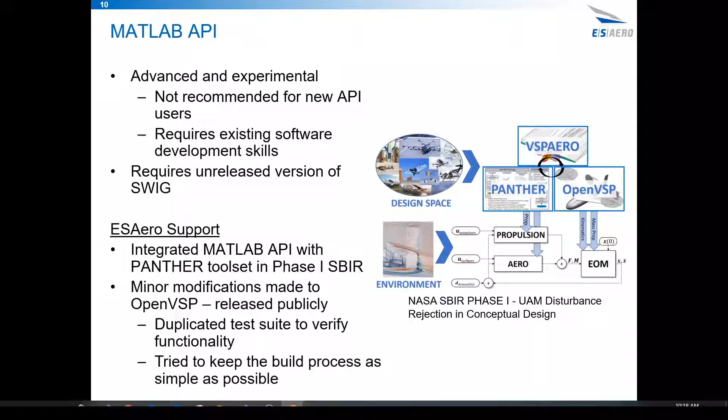In terms of setting up the Python API, what I would do is install Anaconda. I talked about this in the last presentation, but if you're trying to compile OpenVSP yourself using a different version of Python, you'll need to install the latest version and add Anaconda to your system. But if you're just using the version downloaded from the website, you can use this archive link to get Python version 3.6 - you won't have to compile OpenVSP. You'll just be good to go with that version. So those are the two options to get the Python API set up.

So I mentioned this earlier - we have two versions of SWIG. You could just use the latest one, 4.0.2, if you're going to wrap the Python API through a build you're doing yourself of OpenVSP. There was a recent issue found with version 4.0.2 - I was still able to use it to wrap the Python API successfully, but to avoid that you could also just use version 4.0.1.

But now for MATLAB, if you intend to get that API set up, you'll need this custom unreleased version of SWIG that supports the MATLAB bindings. So you'll need to compile OpenVSP yourself. You'll need Git, and I recommend SourceTree as the Git GUI to use with this. Then we've used MinGW with MSYS and PCRE to get the SWIG build to compile and run successfully.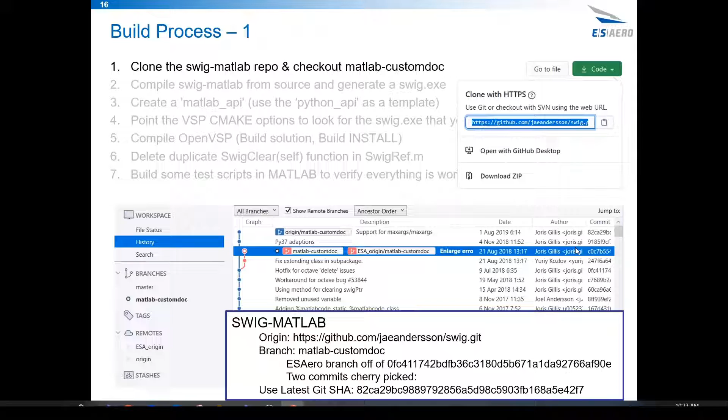Once you've cloned the repository, you'll go into the docs, manual, and Windows HTML file. In there you'll find instructions on how to build the SWIG executable on Windows. What we've done is the MinGW with MSYS approach - I'll explain that in a minute. There are other options, you could use Cygwin or potentially the Visual Studio IDE, but we recommend the first option, and that's what's shown in the instructions on the right here.

So the first step that I took was to install MinGW through the installation package manager, and pretty much installed everything except the ADA compiler. You don't need necessarily everything, but it doesn't take up too much space, and it's kind of better to have. So I just went ahead and installed the Fortran, C++, Objective-C as well.

Primarily, you need the MinGW developer toolkit and the C and C++ compilers. So that's the top one here, this MinGW32 GCC, and this last one here, the MSys base, and also the MinGW32 base. So those are the four primary ones you need. You don't need the Fortran or the Objective-C, but you could go ahead and add them if you'd like. I did not modify the packages. I just used the basic setup. I didn't go in and select individual ones to install or anything like that.

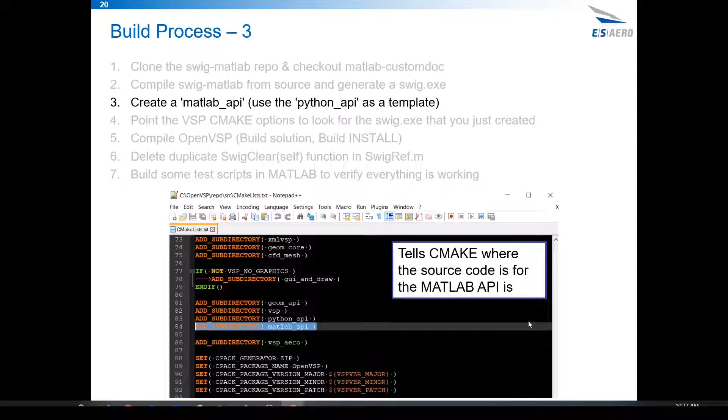Step 3 in the build process is we're going to need to modify the cmake text that's in the source directory of the repository here, the OpenVSP repository. So we just copy add subdirectory and add MATLAB API. That's what this is showing here, the cmake text file. Then what we need to do is copy the Python API folder, and rename it MATLAB API. And we need to make some modifications to those files.

This is something that I actually had a little bit of difficulty with recently. Been working with Nick Brake to generate more clear instructions on how to do that. I will try to provide an update in a timely manner, but this is sort of just we can probably make these changes in a branch and make that available, or even in a normal part of the repo. Yeah, and that's actually something that I thought we had planned. It was discussed at the last workshop, and then might have just got left on the table. And I couldn't find the branch that had these changes on it, and I think Nick had a hard time finding that branch as well.

So I do agree, it would be great to just add this to the public build and have it available for everyone, so no one has to go through this process themselves. They could just have it already available. So at the moment, we're going to be working on that. Hopefully provide an update soon and release it with the next version.

And this just mentions the key changes to the VSP source, modification to control the VSP aero path. That might not be necessary anymore. And then a reference to matrix.h had to be removed just to deconflict what MATLAB uses for its matrix class and what OpenVSP's C++ API uses for its matrix class.

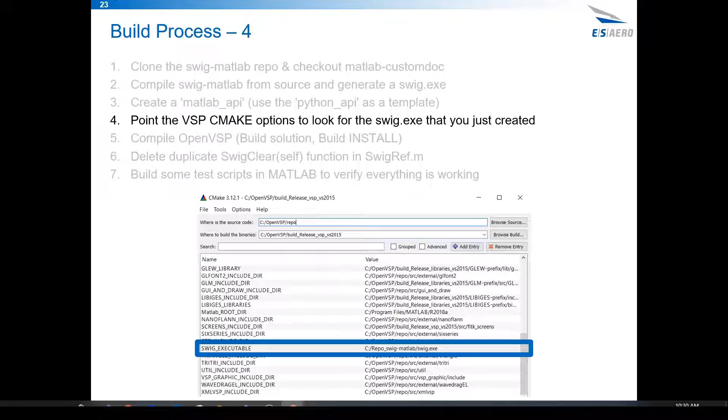When you run the configure button, you'll see these outputs. It'll identify that Swig and MATLAB were found, and it's going to compile these mex files for MATLAB. It'll also identify the other MATLAB directories and library directories and things like that. So obviously, a prerequisite I should have listed is to have MATLAB installed on your machine.

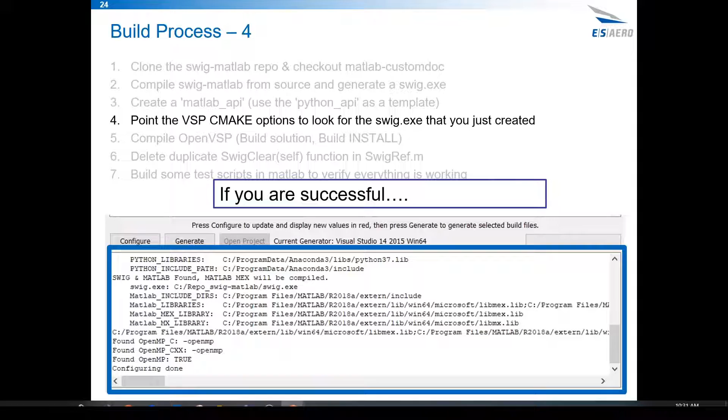Then you could go ahead and go through the whole normal build process. This was done through Windows PowerShell.

Then in the swig-ref MATLAB file, there was a swig clear function that needed to be deleted. That's what's shown here.

And then here is just showing the API tests. We're going to want to run those to make sure our MATLAB API build was all set correctly. And then that's it for the API walkthrough.

I could do a couple of demonstrations. We still have plenty of time, but if there's any questions in the meantime, please let me know.

There have been some questions that have come up, but we've been able to answer them online, at least so far. So we can hang here a second to see if anybody asks any more questions for you to address verbally. But thanks for doing that so far.

No problem. So one thing I'll show in the meantime, everyone feel free to ask questions otherwise. I could just show how you could run scripts through OpenVSP using the VSP script version of AngelScript, so you don't need to compile anything. You don't need to have any Python installed or anything like that. Let me see here.

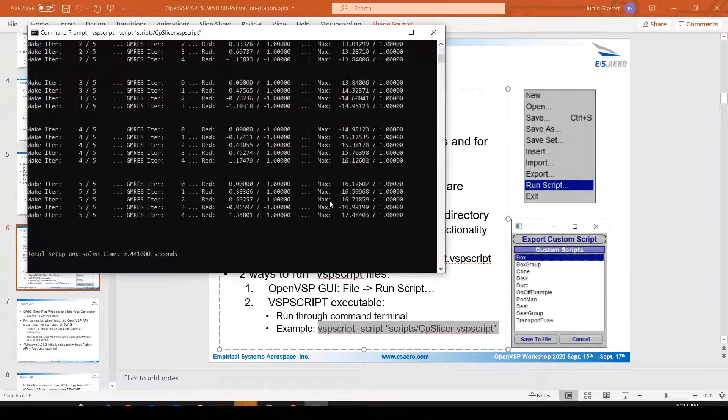And that will go ahead and run the CP slicer analysis. So what that is doing, which I could pull up that example as well, that's finding the CP slicer script here.

And I'll change it so it's in C++ style. So what that's doing is just adding a simple pod and a wing, setting some of the parm values, like the position between the wing and the pod, and then it's just setting up the file name.

So that's what's going on here. Saving it to file, and then it's just setting up your VSP aero analysis by computing the degen geom file, or in this case, actually I might be using a panel method, and then just running VSP aero and running the CP slicer analysis. So those are all the different things that are shown here.

This is just an example. There's a lot more that are available that you could check out.

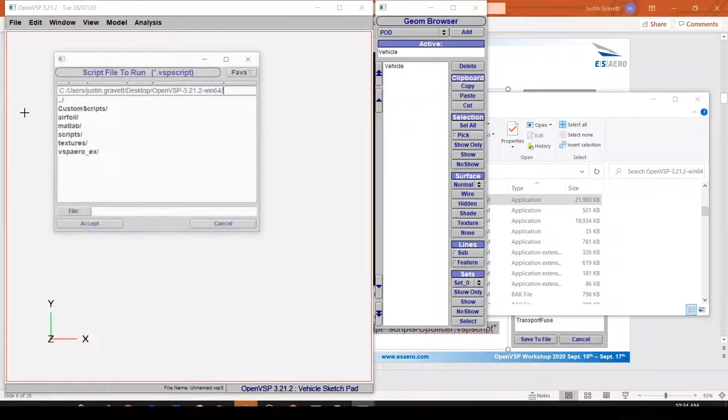Instead of running it through the command line like I did there, I could also just open up VSP, go over to File, Run Script, click on the scripts directory, and do the same thing. And if I look at the terminal, you'll see what's going on there, and you'll end up with your geometry.

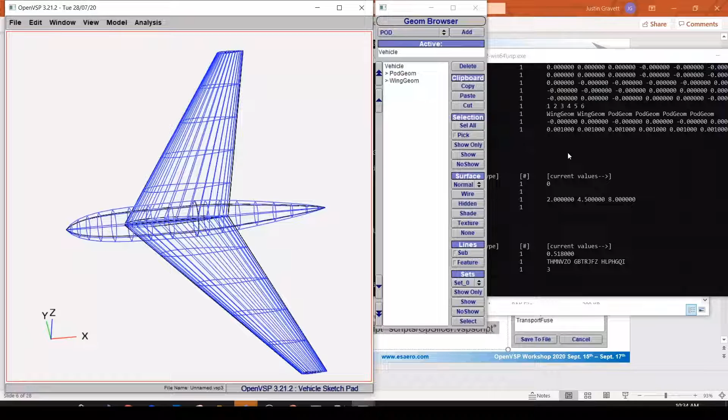So you can use the API to generate geometries, or you can have an existing geometry and read that into the API. There's a lot of different things you could do. Pretty much anything you could think of that you could do in the GUI, you could do through the API, but without any user input.

So you could just set up your script to run automatically, go through a sweep of different locations of things, running with VSP aero, anything like that. You can do quite a bit. We use it all the time at ES Aero. It's been a very, very powerful thing to have access to, so we're definitely appreciative of it.

And I'll add, from personal experience getting into scripting and the API itself, if there's something you're trying to accomplish and you're not quite sure where to begin, you can always ask a question to the OpenVSP Google group, and either Rob or myself or Justin or somebody will chime in and usually point you in the right direction, because there might be a different way to accomplish what you're trying to do. If you're trying to investigate on your own, you can definitely go into the OpenVSP API documentation.

From there, you can usually find the parameter or the command or the types of things you're looking for, and that gives you a great place to start. You can find how to get the parameter ID for a particular component, how to find a parameter, how to do a set param val operation, all of this stuff. The syntax may be slightly different between the API and a VSP script, but a lot of it is almost identical, so it's a really great resource.

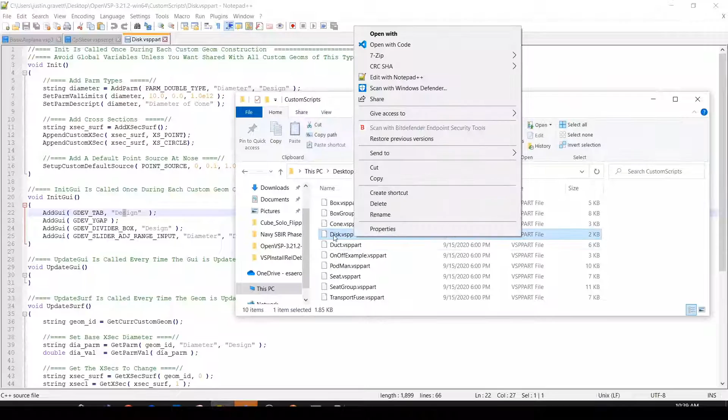VSP part files use AngelScript as well, using custom geom API functions that are provided in the same API documentation as the rest of everything. We include, with the OpenVSP you download from the website, this custom scripts folder that has a few examples in there. A lot of people have made different ones, and you can open them and check out the source code. What OpenVSP does is when you run it, it looks in that custom scripts directory, and if it finds anything and successfully reads them in, it'll have them available here. So you can look at something like the disk, and see how it's parameterized and set up in this VSP part example.

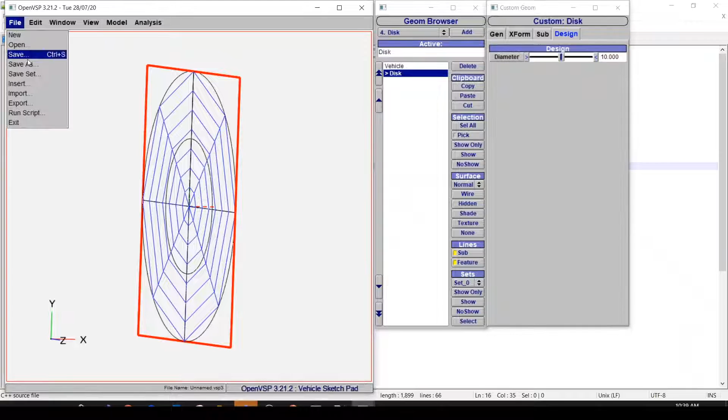Something else I actually learned about recently is if someone provides you a VSP model that has custom geoms in it that you don't have yourself, you can come in and go to export, click on this—it's moved around a little bit recently—and click on custom script. This is after you've loaded the VSP file you received from someone else, and it'll list the custom scripts it can pull from that model, so you can have access to that custom geom yourself. That's pretty neat. We've created a few custom geoms ourselves, as Garrett mentioned in the previous presentation—we made a ducted fan array, things like that. Pretty useful tool, so I just wanted to throw that in there too.

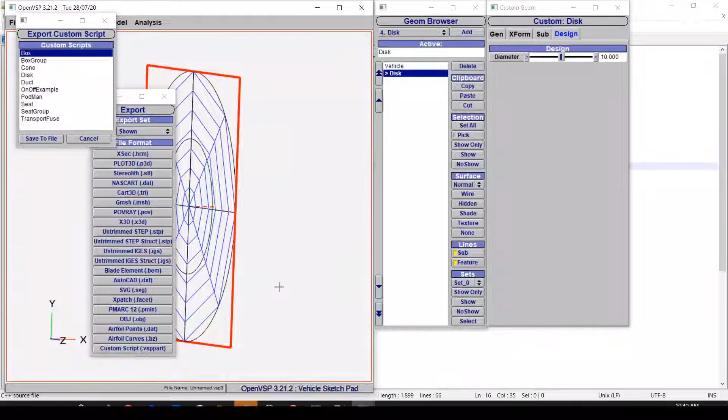Regarding that, if you have your own special sauce or special components that only you are supposed to have, don't share your VSP model with those included—break them apart or do something different with it. Because if you share that, whoever you shared it with has access to that model. Exactly. If you actually look in the XML file, the VSP3 file, the custom geom code, like what's shown here, is actually embedded directly in that file itself. So that's something to be aware of, like Brandon mentioned.